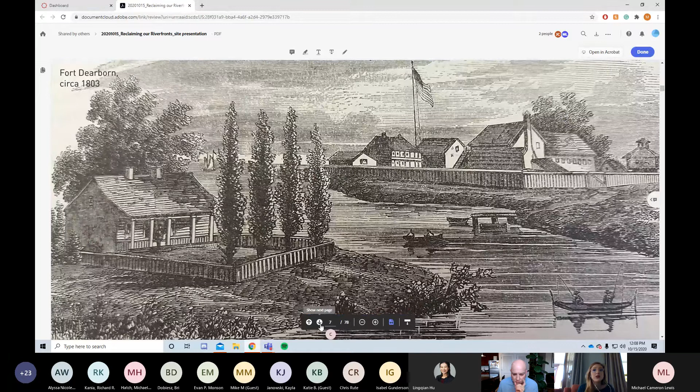And then we came to settle along those waterfronts, again focusing on transportation and trade, and the value that it had to really creating the America we know today. However, as we started developing and becoming more urbanized, we saw the waterfronts really as a means to an end—how could we use those to grow our communities with industrialization?

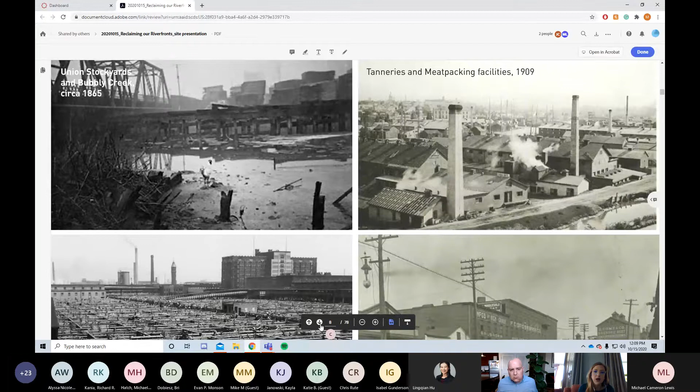In the process, we trashed our rivers essentially with pollution and all of the byproducts of the tanneries and the meat packing. In Milwaukee, a lot of breweries, which we love today, but we didn't always treat the waste and outcomes of these industries in a way that paid attention to the environment. Our rivers definitely suffered throughout that history.

It was still always seen as a transportation corridor—I think even today we see that. But we look at those things through a really different lens now.

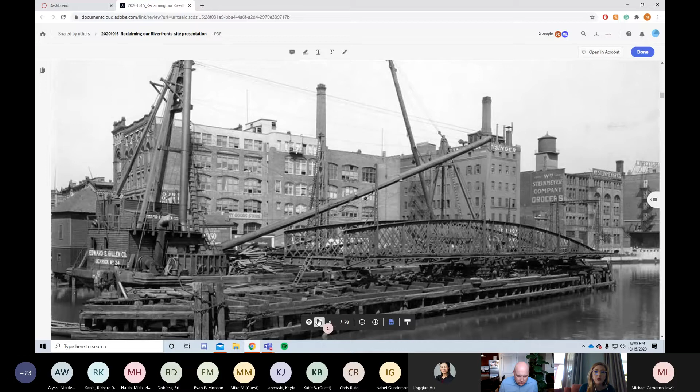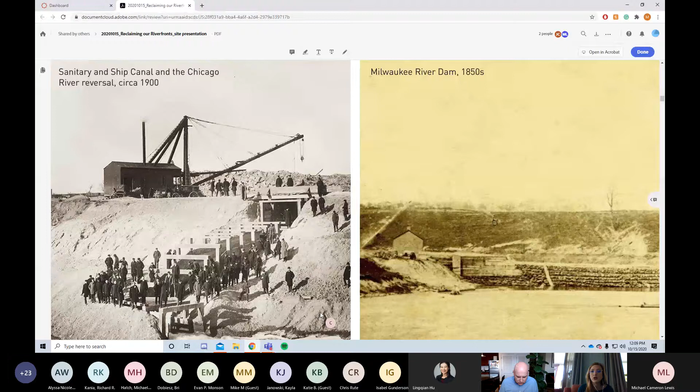Throughout that whole process, when we started having infectious disease and saw the impact of our pollution and waste into the rivers, we went through this engineering feat—in Chicago, reversing the flow of the river to deal with sanitation and pollution, damming the river in many instances, and looking at ways to address that pollution rather than working with the natural environment.

It was really about controlling the natural environment, finding engineering feats and mechanisms that would control and fix the pollution and damage we had done. But in the process, I think we also realized that a lot of what we tried to do just created another problem.

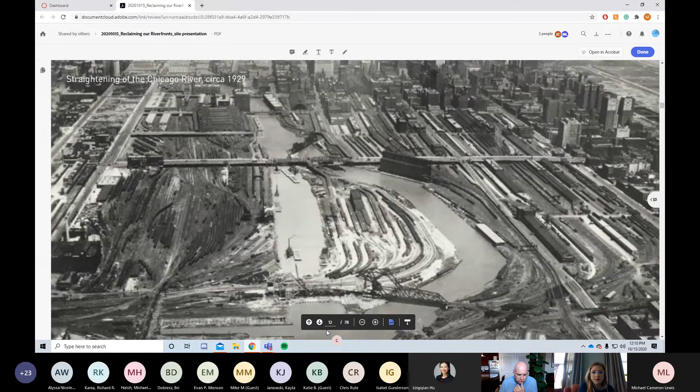In many instances, like in Chicago, another one of those engineering feats was straightening the river, which made it a lot better for transportation, but again wasn't thinking about the impact to the natural environment.

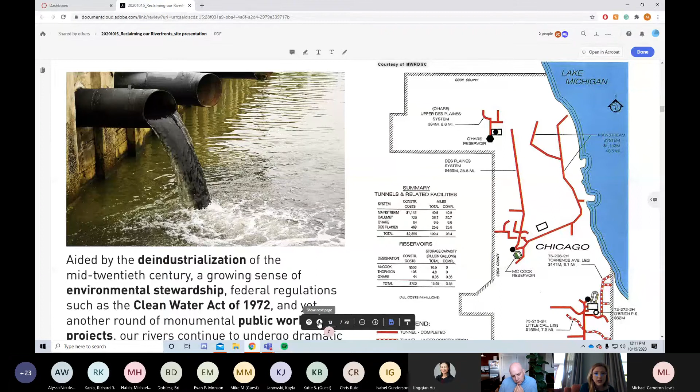It was really the Clean Water Act of 1972, and the start of deindustrializing our cities, that brought this growing sense of environmental stewardship—coming full circle to the way indigenous people treated the environment, understanding our role in working with it rather than trying to control it. That has really started this renaissance of looking at our rivers through a public value lens.

And you see this all over the world, not just in the US. Cities like Pittsburgh and Boston have also developed riverfront design guidelines and design standards, and many other waterfront and riverfront communities are taking note, with Milwaukee and Chicago being two of those.

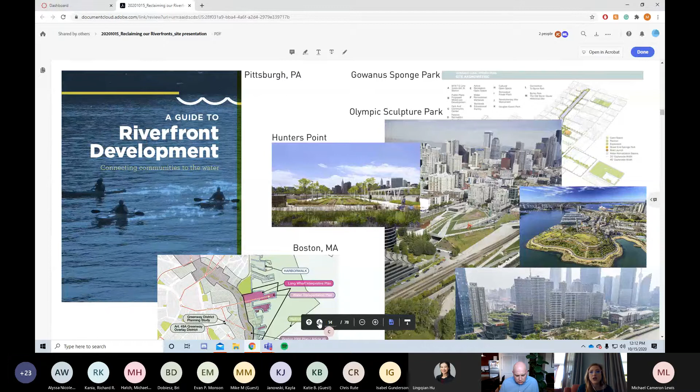But then you also have the implementation of those design guidelines and standards in physical space, with Hunters Point and Olympic Sculpture Park and all of these public amenities that bring people down to the water, again trying to make that connection between our waterways and our cities and our experience of those cities.

Rob, I don't know if you have anything to say about that. I just thought it was funny. It's internet meme worthy today online.

For those of you who haven't seen it before, the Boston Seaport District is quite a model for urban waterway revitalization. Look at some of the public improvements placed along that section of waterfront, the development, complete streets, public access, and all the great stuff we want to see in our cities, and how that starts to become focused in there. It's really become a model for innovation.

And this is happening throughout the United States. It's happening in Seattle, especially in their Lake Union district. New York's got a lot of great stuff happening in the Gowanus area, really trying to take back their industrial riverfronts. These are turning into great places to live, but also great places to work—new office developments, new condos, new public parks. Amazing stuff going on there, led by riverfront development.

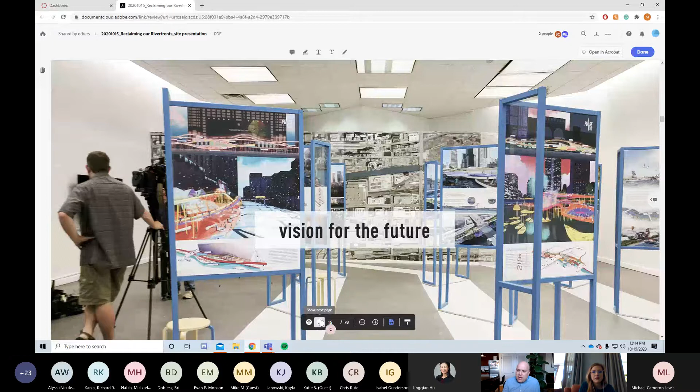That was timely. If you go to the next slide—so how do we get this all started? There's always a vision that needs to be started. When we started in Milwaukee and in Chicago, there were already some planning documents out there, starting to set the vision before a lot of our work came online with different guidelines or standards. In Chicago, there's always been planning documents, a series of pieces.

If you go back one more, it all starts for us with the river back in the early 90s, with the Riverfront Corridor Development Plan, which led to the first iteration of design guidelines, which then in the early 2000s led to building a Riverwalk downtown in the main branch. Then the Our Great Rivers campaign and North Branch Framework—all of these build on each other. As architecture and planning students, that's something you're very familiar with and see on a daily basis. This is not always a linear process, but it needs to be built upon, and there are steps to this.

One of our recent projects—this is a slide from our River Edge Ideas Lab. Back around 2016-2017, we were wrapping up a planning project for the city for the river, and they invited a series of 10 nationally or internationally renowned architecture and landscape architecture firms to submit what they called an ideas lab. It wasn't really a design competition, but as all designers, everything becomes a competition somehow in your own head.

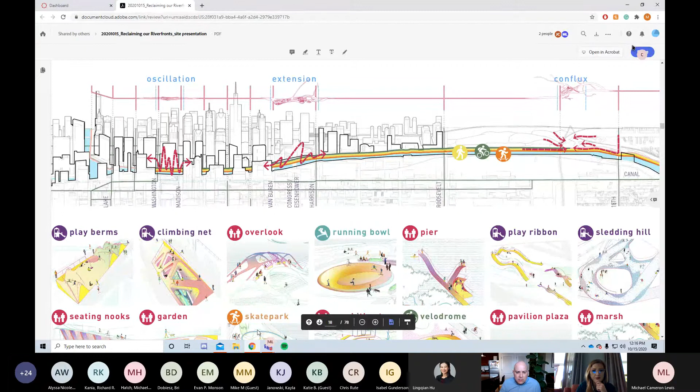This is just a couple of the renderings we've done, thinking about how to move people through the space—really thinking about different types of trail uses, high-speed trails and low-speed trails. We want people to be able to use the riverfront to commute, to use it for exercise, but also want people to walk and linger and enjoy the space without feeling like they're going to get hit by a biker trying to get their miles in.

So this started to look at all the different elements that we can start working into this riverfront. If you're familiar with Chicago, it has a lot of the same issues that Milwaukee does with its riverfront - it's a fairly narrow canyon, you have building faces right up to the edge of the river. How do you actually build a riverfront or a riverwalk within these spaces? You're often projecting out into the water, which has a whole other host of regulatory and engineering concerns.

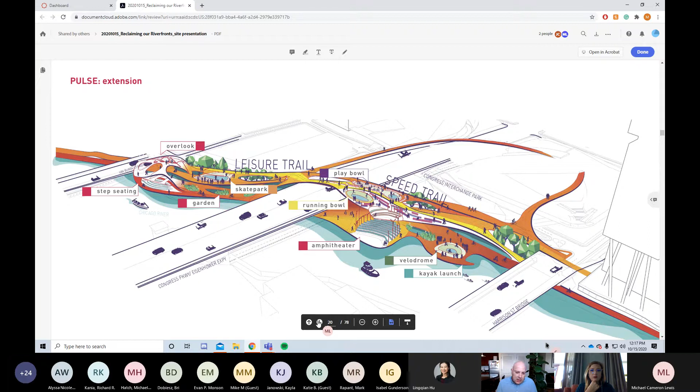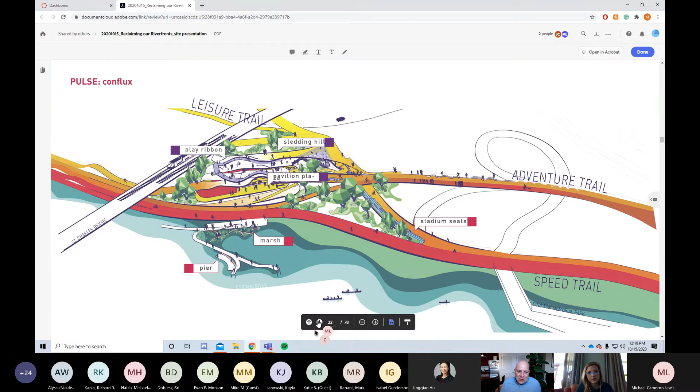And so we looked at a few different sites, oscillation, extension, and then down here on the connection to Ping Tom Park.

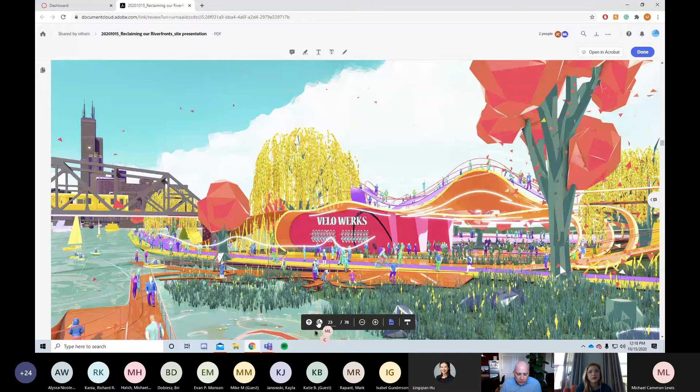So part of what this experience was, was an actual gallery space, and that was the first slide that I showed in this space. MPC and the City of Chicago, which sponsored the Ideas Lab, rented out an art gallery down on the Loop in Chicago, where they had all of the presentations, bulk materials posted up, and then they would have talks each week.

This was an extremely valuable tool in terms of public engagement - we're trying to get people excited about the river. So each week, one of the project teams would give a gallery talk and show off all of the great ideas that they came up with. We did a series of renderings, but then we also did this virtual reality experience you could clip onto your iPhone. This is the former Mayor Emanuel, the planning commissioner, checking that out at one of the gallery openings.

Why this is so important is because, again, we're trying to build public engagement on these types of events. We ultimately ended up reaching close to a few thousand people, maybe 5,000 people, in this engagement process. This really helped lead into our next engagement, which was the Chicago River Design Guidelines, building off previous work to make sure that this is something that's inclusive and equitable, and we're really trying to engage everyone as much as possible.

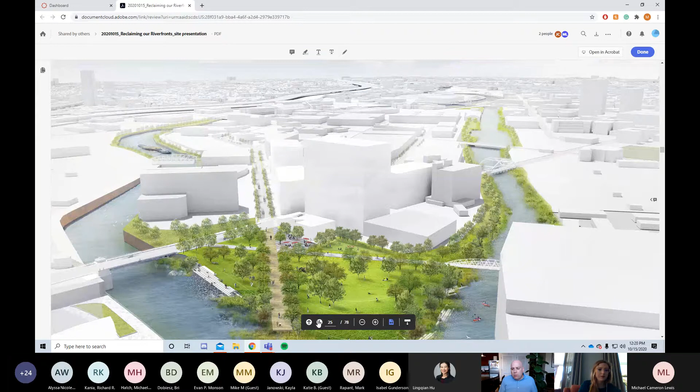So that was the project that was going on, and currently we're also working on the North Branch Industrial Corridor Guidelines. This project is actually very similar to the Harbor District, which we'll get into in a second. But this is an industrialized section of the Chicago River, just north of the Loop. This is actually a rendering.

If you've ever been to Goose Island, or had the Goose Island beer before - this is Goose Island, and right now Goose Island is all industrial, but there's a lot of zoning changes afoot to start changing some of those things and turn it into an innovation district. This was one of our renderings about trying to change the tip of Goose Island, where the North Branch Canal, on the right, and the Chicago River on the left, come to a confluence, trying to build the signature park and open space along the river. So this was one of the illustrations from that.

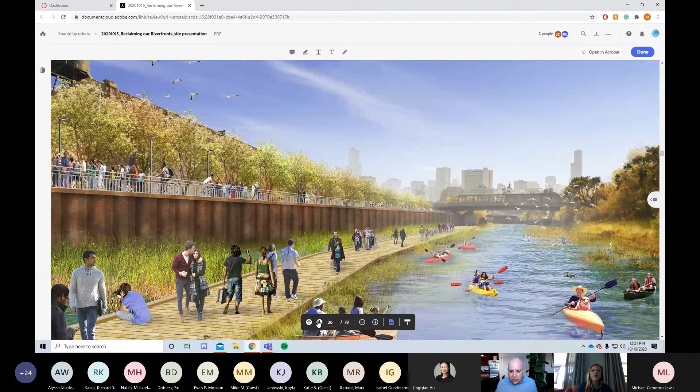We also looked at, again on the North Branch Canal, how do we get people down to the water's edge and engage with it? One of the things that we try to do when we do our riverfront planning - it might sound a little like everyone says this - but it has to be contextual. This section of the river isn't downtown, this isn't the main branch Riverwalk, it's not a very polished section. It's a little bit more industrial, so trying to have different materials, different ways to access the river, different plantings that might be a little less polished is something that we were looking at.

Everything needs to work together and tie into the surrounding community. And then, further on down the river, right after the Ideas Lab, what came out of that was a desire to implement what those ideas were. We had all these great designers come together, but how do we get this thing built?

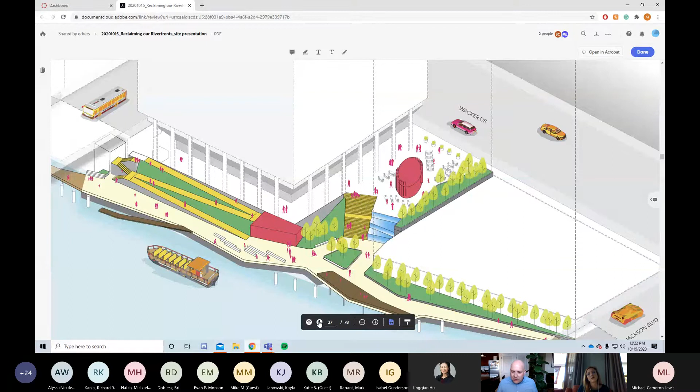So thinking about how we can build pocket parks that provide accessible entrances and unique spaces down to the riverfront, and then building a river walk and river frontage out into the Chicago River, because every building along this side is privately owned. So how do you build something into the river that's all privately owned? You're going to have to create land or have supported structures to do that.

Just another look at how this would work with different sections and a lot of different studies in terms of elevations. There's a lot that goes into riverfront planning when it has to do with elevational issues.

Another thing comparing and contrasting Chicago and Milwaukee: Chicago's riverfront level is pretty static. Even when the city is inundated with rain, if it rains too much, we just open up the locks and dump all the water into the lake. So it's kind of like our dirty secret, but one of the things with it is we don't have massive flooding issues in the loop, so therefore a lot of times we can get away with not totally destroying a riverfront.

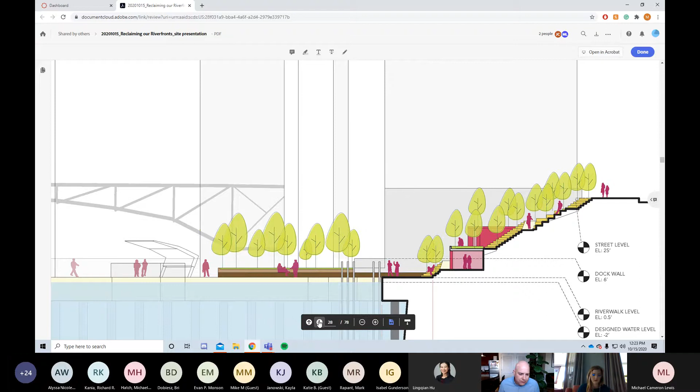Again, just looking at different ways to activate the river, the pink box opportunities. We did a lot of planning studies on how to involve potential sources of income for future development.

And then all of this culminated in, I think, the last thing I wanted to talk about, which was our work for the Chicago River Design Guidelines. We'll get into what some of those entailed, especially how it works with Milwaukee. Chicago is unique in that we have a 30-foot section of land that, once someone builds a building or does a redevelopment, that 30 feet is dedicated public access and is required to be for public use.

And the river guidelines set forth a series of guidelines on what those areas need to look like and how they get built. And then there are also triggers or things that we encourage private developers to do, whether those are different overlooks or shoreline treatments or restrooms or things like that, that they'll be judged on a point system to help facilitate those improvements.

But with that, I think Cassandra's going to take over here and talk a little bit about the Milwaukee standards, because I think that's what you guys are all really curious about. So we can go to the next slide.

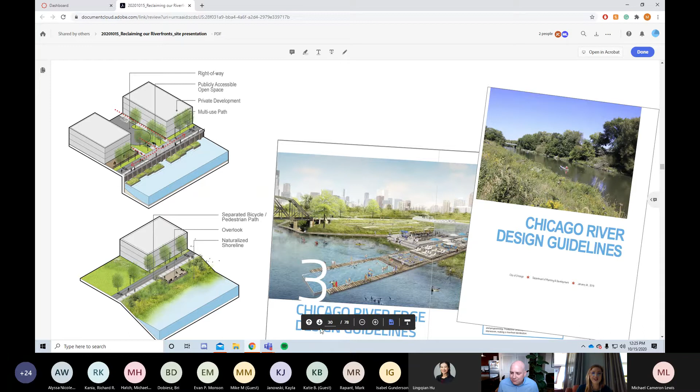Yeah, so while this was going on in Chicago, there was a very similar movement going on in Milwaukee, many of you are probably well aware of. At the same time that we're having all of these planning studies in Chicago, the exact same sort of things are going on in Milwaukee with the Harbor District Water and Land Use Plan, the Riverwalk, the initial Riverwalk guidelines, and watermarks that looked at public art and the different spaces along the river. And then even going a little bit beyond what was being talked about in Chicago, actually talking about the water quality and the ecology and the habitats and the environment of the Milwaukee River and the entire system.

And at the same time as all of these planning studies were going on, there was the Waterfront Innovations Design Charrette, where four design teams were selected from all over the world to participate in the same sort of exercise as the River's Edge Ideas Lab, coming up with strategies and visions and ideas for what could happen within the Harbor District.

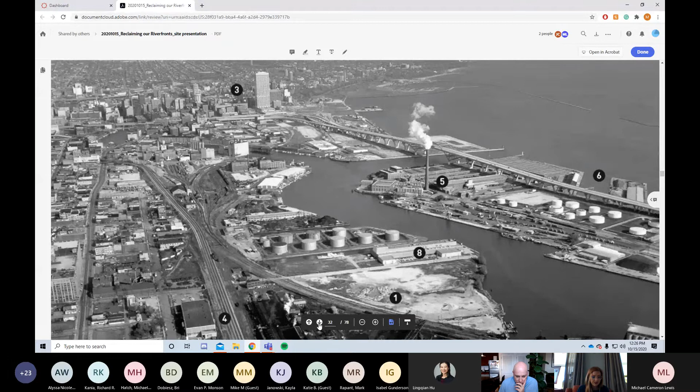A lot of this built upon the other branches of the Riverwalk system within Milwaukee, the downtown Riverwalk, which has one character, the Third Ward, which has another. But the Harbor District was really the last piece of the puzzle to figure out what that looks like. And so the Innovations Design Charrette provided an opportunity to dream big for what this area could look like.

So you'll see some renderings that firms put together, not just green space along the river, but development potential, softening that river's edge. A lot of the exact same sort of ideas that were coming out of the River's Edge Ideas Lab.

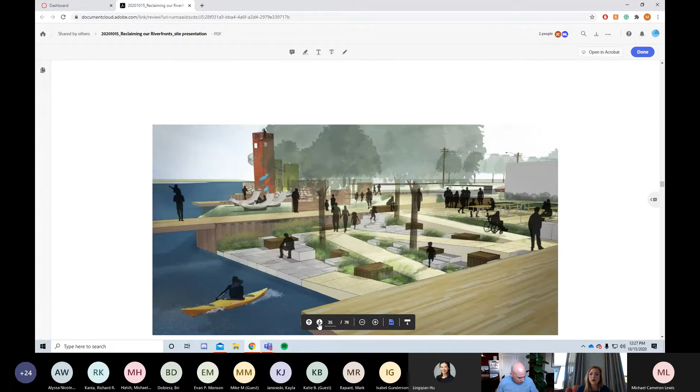And one of the key ideas was the Harbor View Plaza. This image shows more of the north side of the Harbor District. The School of Freshwater Sciences is just south of this area in the rendering. So one of the big ideas was this Harbor View Plaza - again, how do we get people down to the river? That was one of the key items, making it a public amenity.

And we realized with the Harbor District that we need to keep those industrial land uses, those manufacturing land uses, but at the same time there was overwhelming support for getting people down there and in contact with the river through kayaking, public spaces, natural areas, and things like that. So a lot of these visions served as the foundation of what would eventually become the Harbor District Riverwalk design standards.

Just to build on that, I think what's really important is that you want to get people down there in a safe way, because it's actually pretty exciting to see all of this industrial activity when you're down there - seeing the ships pull up to deposit material, the big cement factory down there and the silos associated with that. It's really neat, something super unique that shouldn't just be driven out.

As we mentioned, the Harbor District is really that last piece of the puzzle in terms of getting people down to the river and providing connections and access. It built upon the previous sections we talked about with the Third Ward and the Menomonee Valley. You'll notice on this page there are two documents: the Riverwalk Design Guidelines for the historic Third Ward, and the Design Standards.

One of the things that was interesting, not just within this process but also in our work with both Chicago and Milwaukee, was the difference in how the documents are used. That word standards versus guidelines is really key, because in Chicago the document is not codified - it's not required technically, not part of the zoning code. But it's a tool the city has adopted that allows them to negotiate with developers and provide a public good to city residents, while having greater flexibility because it's not part of the zoning code.

Then we get into Milwaukee, and the design standards are actually codified and required as part of any development that goes into the Harbor District or the Menomonee Valley. So that's one of the biggest differences.

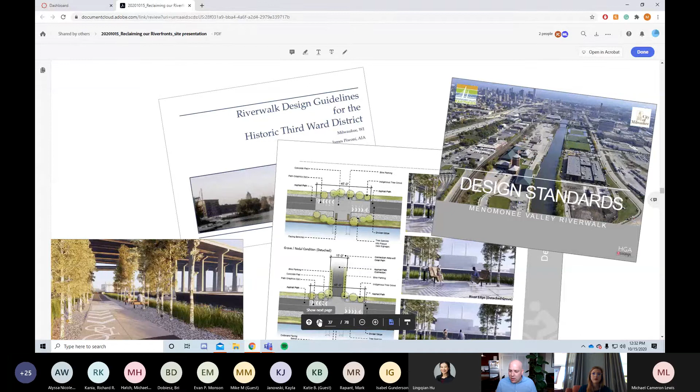Yeah, you can flip through the next two slides till you get to the small thumbnails. The success of the Third Ward and some of the other sections is really what inspired a lot of the work we were doing within the Harbor District.

Another piece of that is that it wasn't just a missing piece we wanted to fill in, but also the fact that we have a lot of new development going in. So there's the opportunity now to re-envision what these spaces could look like, because there are already architects, designers, landscape architects, and planners doing that at an individual site level.

So Harbor District Inc. and the city of Milwaukee wanted to take the opportunity to say, okay, we understand each site is going to have its own priorities and its own character, especially with the architecture, but how does that tie into the identity of the entire Harbor District? Go to the next slide.

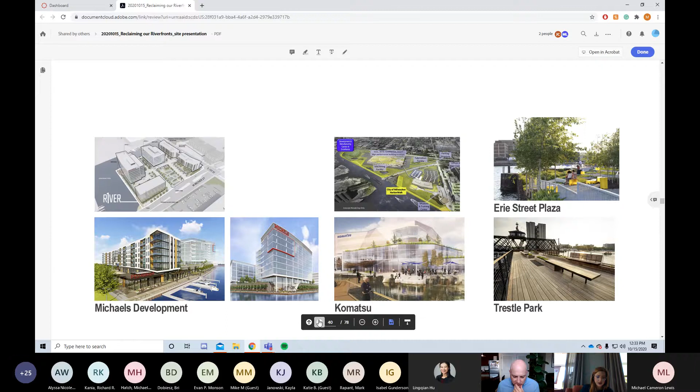As part of that, we did a really quick exercise. The Komatsu site, which you can see was in the middle on the previous page, the largest undeveloped parcel of the Harbor District, is already in the works to be constructed—they have a plan and a vision and have been working with the city for a while. As an overlapping project, we worked with them quickly to come up with some sketches, because we didn't have the design standards complete yet, but we still wanted to make sure we were getting ahead of the development and construction process to say, this is what we know the design guidelines are going to eventually say.

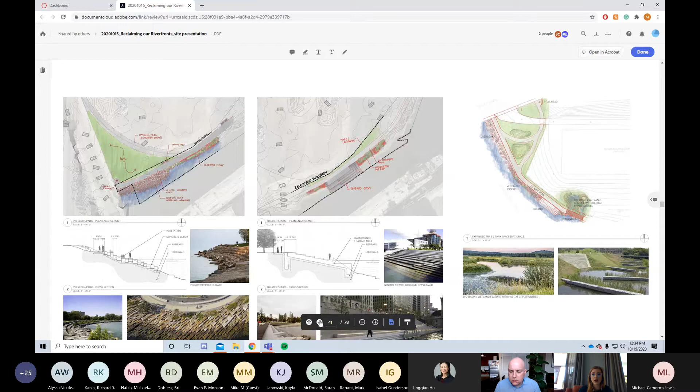This project development site is a little further along and is probably going to continue to be further along than the design standards themselves. So how can we bridge that gap and make sure that whatever happens on this site still adheres to the eventual standards that are going to be put into place. So go to the next slide.

With the Harbor District, this was our study area. You have the SPROZ over in the map to the right that's outlined. So any property that touched that or was part of that overlay zone is what, as they're developed and improved, will have to adhere to the new design standards.

We started looking at what those look like within the Harbor District. There are two different zones: what we've called the urban Riverwalk zone, which is a 15-foot setback from the seawall, and then the multi-use zone, which has a wider setback of 25 feet. That alternates throughout the Harbor District zone, and that was our basis for design—the criteria within which we had to develop these cross sections and standards.

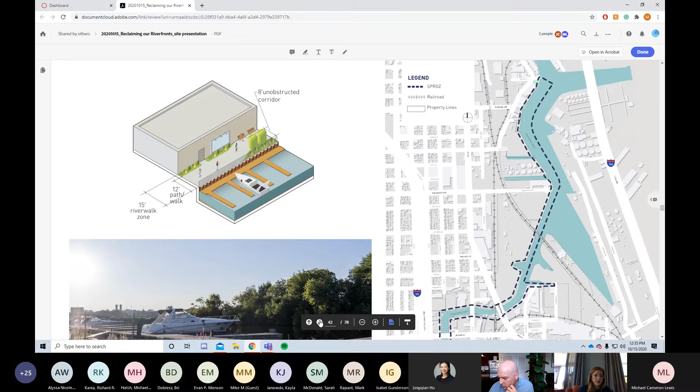A big piece of the process to do that was community engagement. So you can go to the next slide. We had stakeholder meetings, we had a big open house, and we also piggybacked a little bit on an existing event at Harbor Fest.

We had about 3,400 people who came to Harbor Fest and visited the booth and talked with us, providing feedback on things like signage, site furnishings, plant palette, and just in general what they wanted to be able to come down to the Harbor District to do and to see.

And that directly influenced the standards that came out of it. So you can go to the next page.

As I mentioned, we have two different setbacks, and what does that mean for what these spaces are going to look like? With the multi-use setback, we looked at a 14-foot wide path with a buffer along the edge, and this kind of flex zone. While the standards are required, we worked really closely with the city and the Harbor District to develop cross sections that are clear enough that a developer or property owner can understand the expectation for their site. However, it's flexible enough that if their space doesn't quite meet one of these, or if they want to incorporate something or go above and beyond what the standards say, there's flexibility to do that. So we have this flex zone on the outside.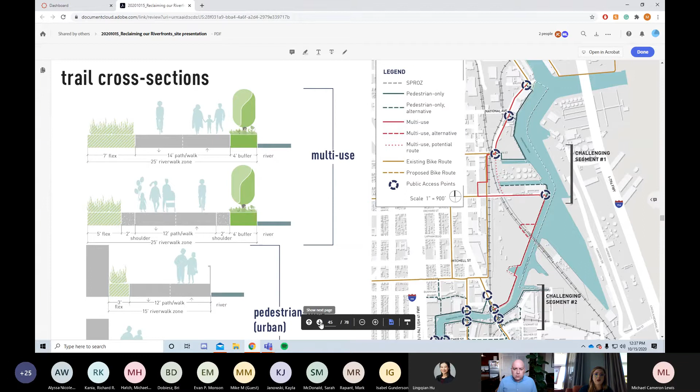There's a buffer on the river side, again thinking about potentially softening that edge or creating more of a connection to the water trail.

Those four cross sections before were the standard ones included in the standards, but we also looked at other options to again provide flexibility for a property owner. If they know, based on what's going on at their site, that they have issues with water levels or erosion, here are some other ideas they could incorporate—whether it's an overhang and cantilevered river walk, a platform that can accommodate changing water levels, or even separating bicycle and pedestrian traffic if they have the room, like a 25-foot setback, to accommodate different modes of travel with dedicated lanes. So again, trying to provide flexibility for a property owner as this trail gets developed.

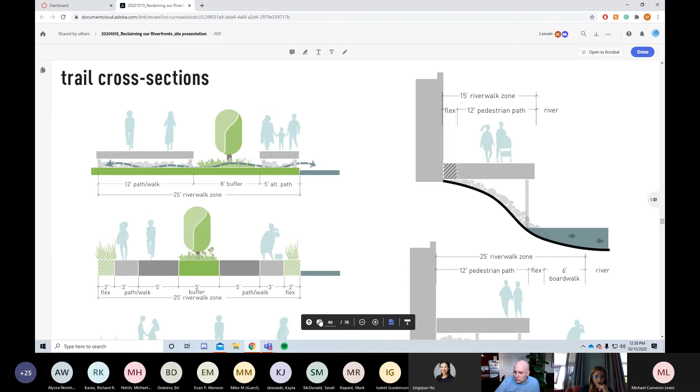On top of the criteria for how it needs to be designed and what the cross section looks like, there's also the question of character. This is where, through community engagement, we dug deep into figuring out not just what the community wanted to experience when they were there, but what they felt the character of the Harbor District was and should continue to be. We heard words like industrial and rough, and the brand of the Harbor District is green, gritty, real. So how do you translate that idea into a physical space?

That's where the family of furnishings came from that you can see on your screen, using large wood timbers, Corten weathered steel, wood decking, and even potentially steel grating in some areas—a character that's very unique and authentic to the Harbor District and the land uses that are there and likely should remain into the future.

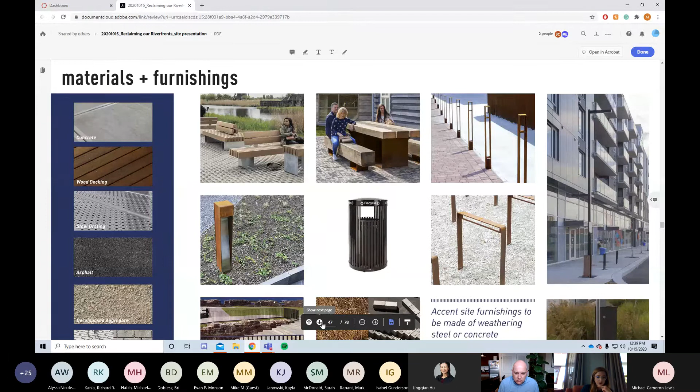On top of the character and experience, we also started looking at the natural environment and ecology. This is where the Harbor District and the city really took it to another level that hasn't been seen in other sections of the Riverwalk. For example, within that zone, the standards prohibit invasive species and also prohibit turf. You'd think turf is the easiest thing for a property owner to maintain, so that's what they're going to want to do.

But it's not necessarily the most environmentally friendly, especially along a riverwalk where you have issues like erosion and the different aquatic and upland habitats located along the river. That was one of the pieces of the standards that really stood out, not just compared to other design guidelines within the city of Milwaukee, but other standards happening around the country, where a lot of cities aren't comfortable prohibiting something like turf, which is a very standard, easy thing for a property owner to do. Another piece of that was stormwater management.

The city of Milwaukee already has a requirement that if there's a disturbed area of 15,000 square feet on a site, you have to incorporate stormwater management practices. But what happens if the disturbed area is smaller than that? At this time, in other areas of the city, there's no requirement. So the design standard said that even if the project doesn't trigger stormwater and green infrastructure requirements based on size, it's still required within that planning area and overlay zone to have at least a minimum of one green infrastructure menu item, which could be a rain garden, a stormwater tree, a bioswale, or permeable pavers.

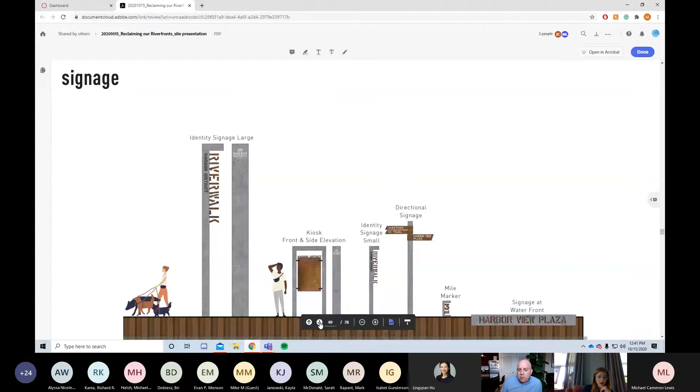One thing I want to mention is that everything along with the softscape improvements to the stormwater and landscape is obviously making sure we're not just thinking about people. We were thinking about little critters too, making sure we have wildlife habitat, whether upland habitat or in-stream and in-river habitat opportunities as well. That was pretty key to our planning process, and we had a couple different stakeholder group meetings centered just around that.

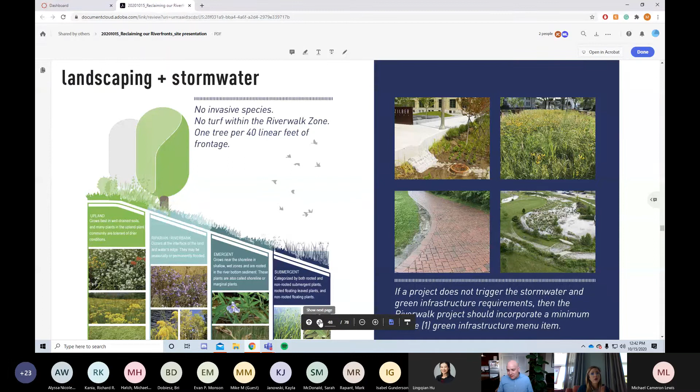The School of Freshwater Sciences was really heavily involved in this, helping to develop those recommendations and reviewing them, again balancing what we wanted to do to improve the environment with the cost and feasibility for a private property owner.

In the next slide, we also looked at branding and identity, so there's the brand and identity of the Green, Gritty, Real. Just like with the site furnishings, how do you translate that into signage and wayfinding that helps people navigate the site and study area, and is really legible for both visitors and people who live and work there? We came up with three different options for a signage family and brought them to the community, the stakeholders, and the BID district.

This is the selected character of the signage. The next step, like the standards document, provides more of a guideline for this kind of signage and wayfinding element. This would need to be taken into a more technical engineered version to finalize what that would actually look like, but this is the character that was established.

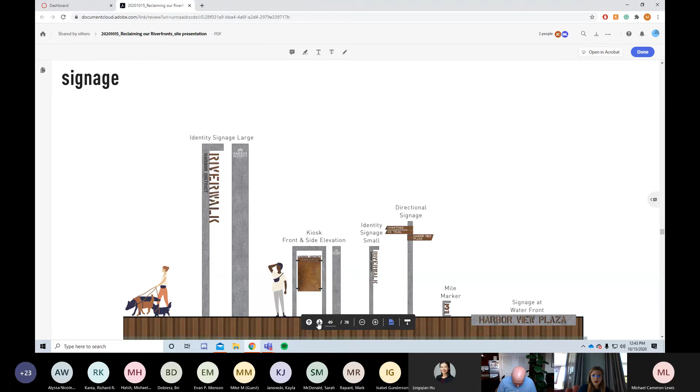Finally, the last piece of the design standards process was to look specifically at some of the nodes along the harbor district and the riverfront. These are called challenging segments and public access points. The challenging segments were challenging because they had land uses that

are essentially in conflict with pedestrian or public use. So how do we still maintain public access if this land use really shouldn't have people anywhere near it? How do we go around that? How do we navigate it? How do we think about phasing for when that land use may or may not exist in that same location in the future?

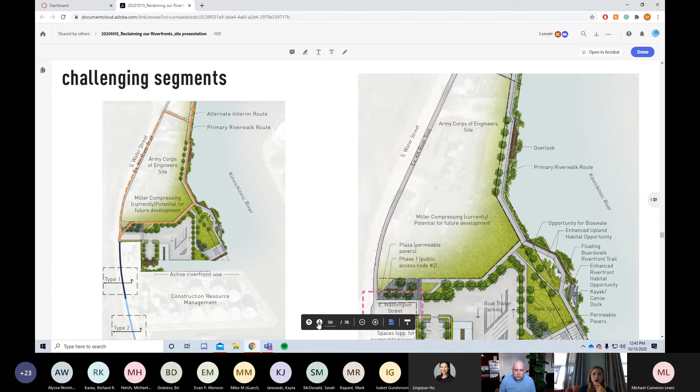We were looking at a site right north of the construction resource management site, which is essentially an asphalt plant that can't allow any sort of public access. The property right north of there, in the WaLUP or the water and land use plan, was dedicated or categorized as a future park site. So we were looking at what that could look like—could it be a boat launch? Is there an overlook? And then how do we get people to navigate around that construction resource management site and still connect back into the Riverwalk?

The next challenging segment was by the railroad bridge and Kinnickinnic Avenue.

This being said, you can't necessarily get people under the bridge, and if you can't go under it and avoid both rail and vehicular traffic, how do we safely get people across? So we looked at a few different options: signage, wayfinding, lighting, and any pedestrian safety improvements that would help solidify this connection to maintain a continuous river walk.

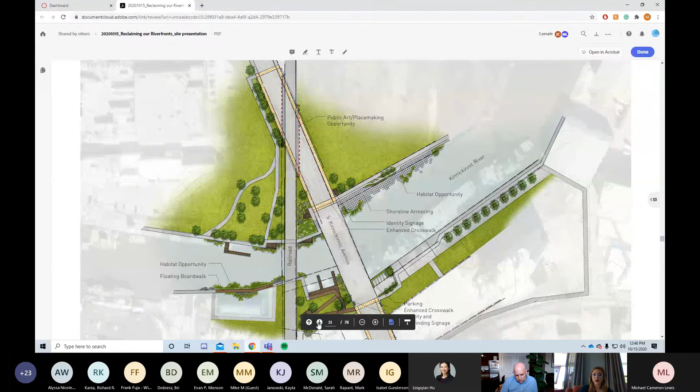We also talked a lot in this section about the operations of the Riverwalk, which isn't necessarily incorporated into the standards, but it was an important conversation to have during this process. It allowed the city and the harbor district to understand internally how they needed to operate, maintain, and use this, including areas that may need to close off public access. It was also an opportunity to maintain transparency and communication with those properties up front, before the Riverwalk is even constructed.

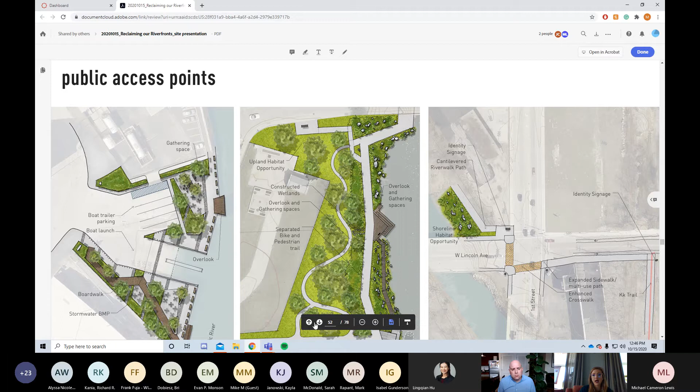Let's go to the next slide. Some examples of the last three public access points: the Bruce Street boat launch, what that could look like while still maintaining a boat launch but creating more of an amenity with boardwalks, outdoor seating, landscape, and bioswales. The middle one has additional trails and natural features that create more of a public amenity where people stop and stay, wanting to visit rather than simply passing through.

And then I will hand it off to Rob to talk through the process of how we plan for a new riverfront, a more public and valued riverfront. He's going to talk a little bit about what that actually looks like when it gets built.

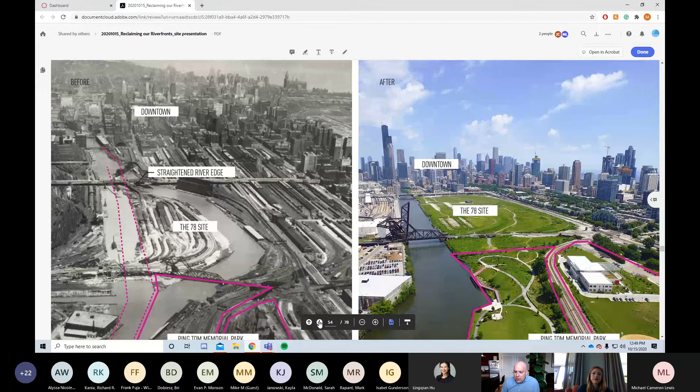Just to the north of that large bridge, called the St. Charles Airline Bridge, you have what's called the 78 site. That's going to be about a 60-some-odd acre site of new development in the city of Chicago, just approved last year. Probably a 25-year build out, but they're planning great improvements there, including what they're calling the Discovery Partners Institute, a large research institution, offices, apartments and housing, and a 100-foot dedicated riverfront experience along the west side of the site, really making the riverfront the forefront of the development. Let's go to the next slide.

So today, looking at some images of Ping Tom Park, we're reclaiming former industrial lands. This is on the south side of Chicago, very close to the Chinatown community, so it has a lot of that vernacular architecture. Again, it's about getting people down to the site. This is at their yearly dragon boat races; some of us have participated, and it's surprisingly hard, but a lot of fun if you ever get the chance. Let's go to the next one.

This is an image of phase 2.

You can again see the St. Charles Airline Bridge to the left, and the 78 development will be out in the distance. This was one of the boathouse projects we worked on—a boathouse where they rent canoes and kayaks through REI, providing public access down to the water. This was one of Mayor Emanuel's initiatives from his first term, where he wanted to build a series of boathouses along the Chicago River to expand recreational opportunities. There were three, maybe four, built for crew rowing. This one was more of a recreation canoe and kayak boathouse, set within the Ping Tom North extension, with a field house off to the right. What started as a relatively average sized park 25-30 years ago has now turned into multiple phases and basically a multi-decade odyssey for our firm.

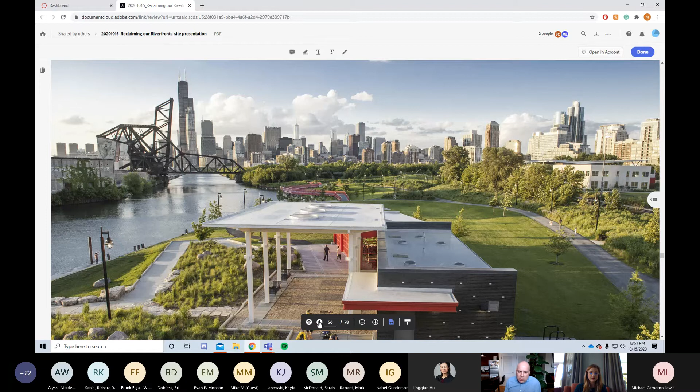Looking at some of the improvements out there, a lot of natural areas—really trying to make sure we aren't just planting grass everywhere, but have natural landscapes and habitat opportunities.

Just an aerial view, again trying to find lost spaces. This is the split between the two. Ping Tom is a horribly disadvantaged park, frankly, from an access standpoint, but it makes up for it in the opportunities it has for recreation. It's cut off from the city by train tracks the entire length, with an overpass separating phase 1 and phase 2.

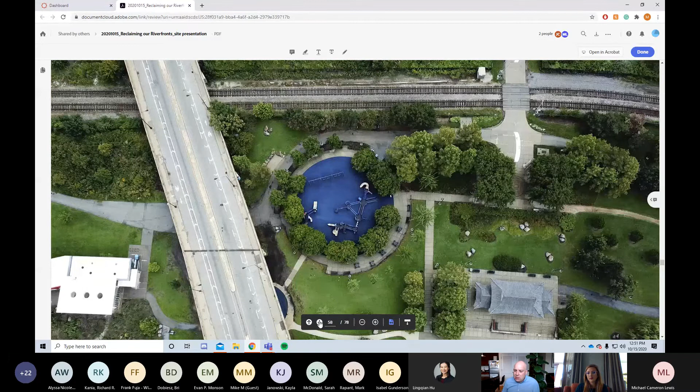It's a pretty unique experience if you ever get a chance to get down there, to really try to make the most out of what you have. Looking back towards the south, there are some opportunities with boardwalk improvements and ways to get down to the water's edge.

This is an area where we actually pulled back the steel sheet piling—something really important when any riverfront development is trying to naturalize that edge. So many of these urban and industrial riverfronts have that steel sheet piling, and trying to get away from it is key because it's terrible in terms of habitat and water quality. So at this section, we pulled the sheet piling back and terraced down with naturalized landscape along the shoreline. This is a really unique feature, one of the first this close to the loop that was completed.

I touched on this before when we were talking about the North Branch Industrial Corridor guidelines—we wrote those guidelines. This was actually the first project that came online post-guidelines. This is C.H. Robinson, a large shipping and logistics company. It's their headquarters, and it's right on the Chicago River.

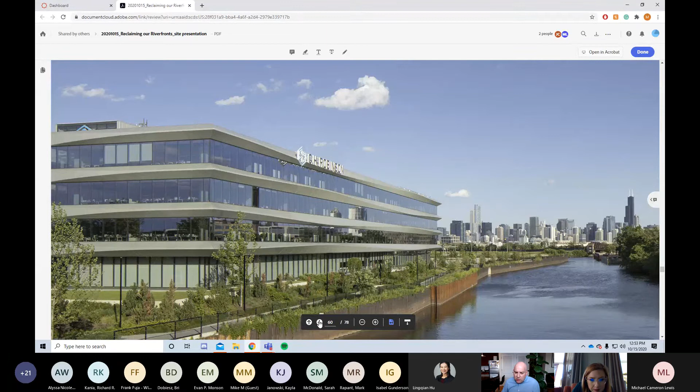This will be part of a larger site you may have heard about—it's part of the Lincoln Yards site, a large master plan. If you haven't had a chance to check it out, I really think you should. The master plan was completed by SOM and Field Operations, and it has some really unique urban riverfront spaces. This is one of the first projects built within that area.

Just another image of C.H. Robinson, showing some of our work on the naturalized landscaping and different riverfront paths along the way.

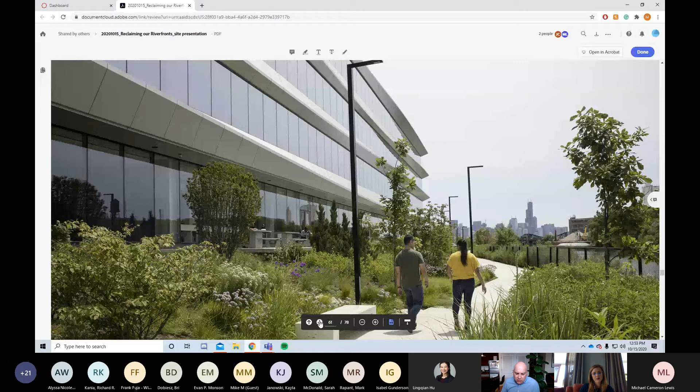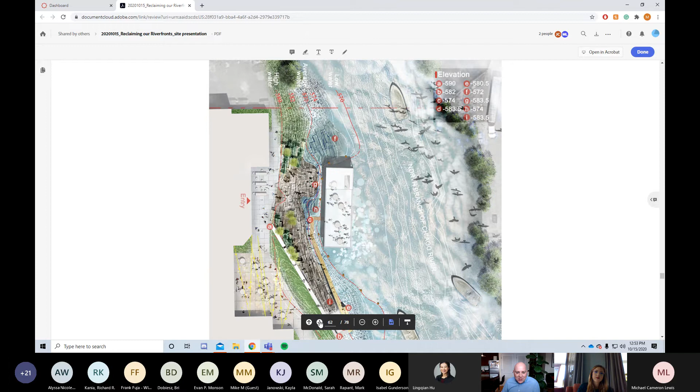Further up the river, thinking about different uses and fun stuff—this was a plan for an old warehouse, I'd say like Rockwell on the Chicago River, that they wanted to turn into a brewery and outdoor drinking and eating establishment. One of the things we floated—terrible pun, sorry—was the idea of an actual barge or vessel out in the water that they could have events on.

Here's a rendering of that. We were looking at different ways to treat the shoreline, with maybe some opportunity for a floating event space. This was never fully realized, but it's now home to Metropolitan Brewing and their brew pub.

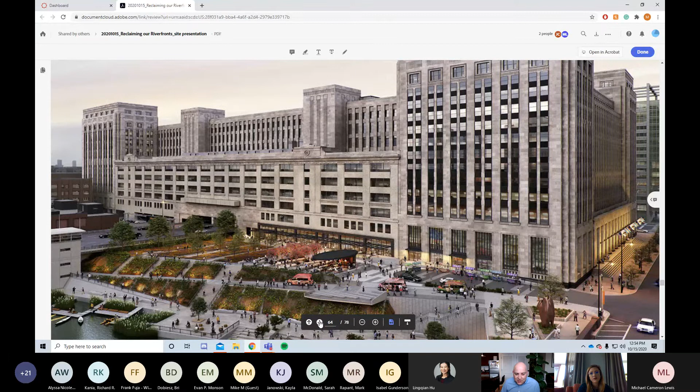This is a rendering—a surprisingly realistic one—of the old Chicago Post Office. You've probably seen this in the news recently.

The Chicago Post Office has been vacant for about 30 years in the city and has really struggled to find a developer to take it on for redevelopment. It's about 2 million square feet of office space. One of the unique things about the post office is it's right on the Chicago River, as Interstate 290, the Eisenhower, comes into the city from the west, and it has great river frontage, although it is separated by a ramp that goes down below the expressway. We led the planning and design of how to really turn this into a Class A civic space.

I would say this probably won't ever be fully realized to this degree. We've only built the upper plaza, and that's still under construction, but we're hoping that in the future they'll take on the riverfront edge and provide public access down to the river's edge.

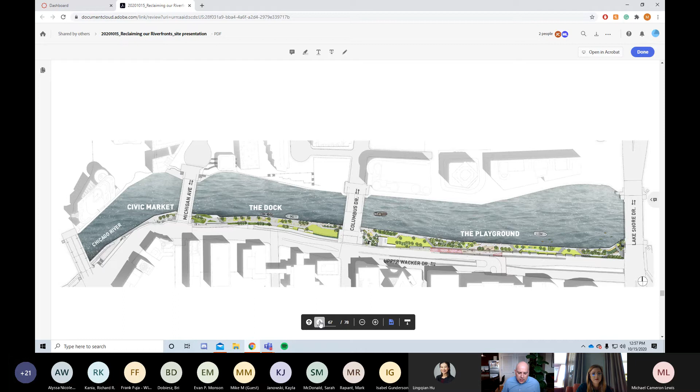We tried to look at different ways for people to gather within these spaces. We had a bit bigger of a section, so this is a little more park-like, with different gathering spaces. We have some really unique seating opportunities we placed out there that really haven't been done in the city before.

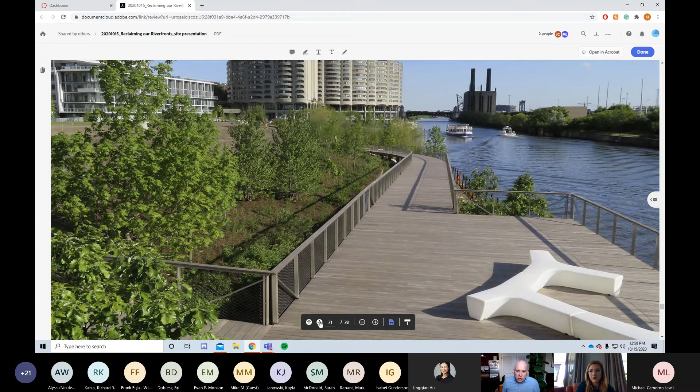Again, more urban riverfront development. This is South Bank, done by Hoerr Schaudt Landscape Architects. They changed the design and the name a couple of times. Again, this is all coming online in the past 5 to 7 years - it's pretty amazing how fast things have changed, at least in Chicago. This has a naturalized edge, a beautiful boardwalk, and this is all paid for by the development team just next to this. Another view of the riverfront improvements and the kind of amphitheater space they built along there as well.

In addition, further up river, really thinking about connectivity. We talked a lot about biking and making sure this is a strong commuter link. The Lakefront Trail in Chicago is great to get from point A to point B if you're going to ride your bike to work, but if you don't live so close to the lake, it's not so great. So this was a project done by Epstein, a bridge section that connects about 4 blocks between Horner Park and River Park in Chicago. It was recently opened, I think last year, and it's been wildly successful because it connects 2 major open spaces, and we're really trying to connect those last pieces along the river for biking in the city.

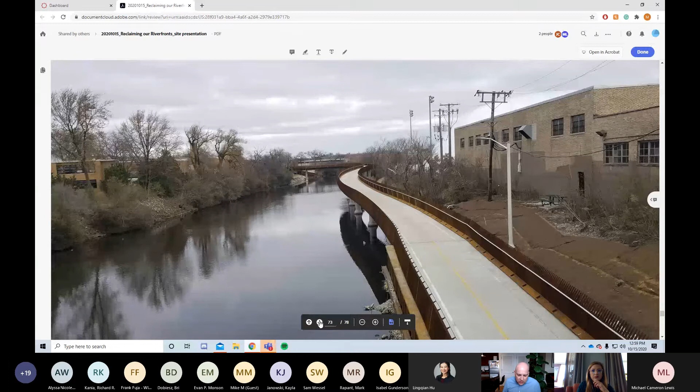Go to the next slide. I think you need to talk to this one, Cassandra. Yeah, so we showed a lot of what's going on in the city of Chicago, but we definitely wanted to do a nod to what has been started and what's going on within the Harbor District since the design standards. So this is an in-progress, under-construction image of the Michels development site on the southern edge of the river.